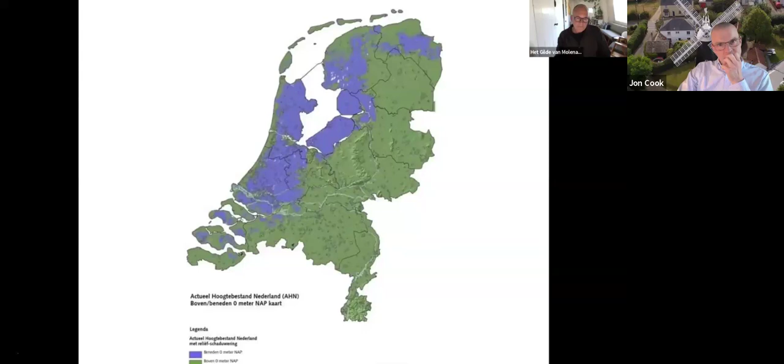There was also a rise in sea level. Water nuisance increased and measures had to be taken. The monks of Egmond Abbey were probably the first to build internal dikes to protect their lands from flooding. This started at the end of the 10th century. As the external water level rose and the reclaimed peatland subsided, it became harder to discharge excess water naturally. People first turned to hand, tread, and horse-powered watermills, and later to small windmills.

In 1407-1408, William VI, Count of Holland, ordered some of his advisors to investigate a mill in Alkmaar, that's where I live now, that was pumping out water. They traveled from The Hague to Alkmaar to investigate how Floris van Alkemade and Jan Grietensoen were using a mill to discharge water. This was considered very important in The Hague, though the exact method of pumping was not recorded. Unfortunately, there are also no images of the 15th century mills.

Later, quays were built and simple sluices and closable culverts allowed water to be discharged into the water outside the polder, only when the external water level permitted. The establishment of polders created artificial control over water levels. A difference arose between the external and internal water levels, or between the boezem, the buffer, and polderwater. Small polders were merged into larger ones, each with its own administration. The focus shifted from individual measures against water nuisance to collective solutions.

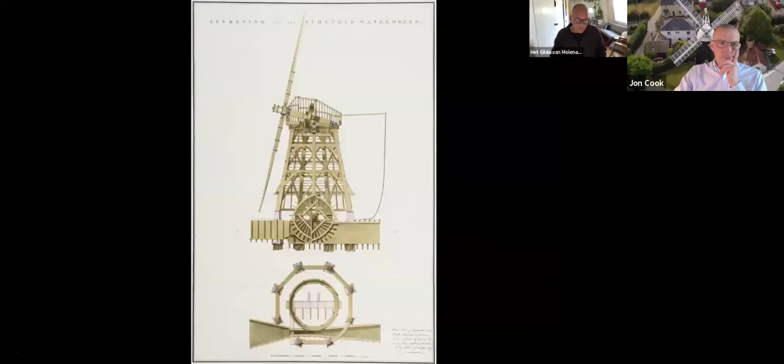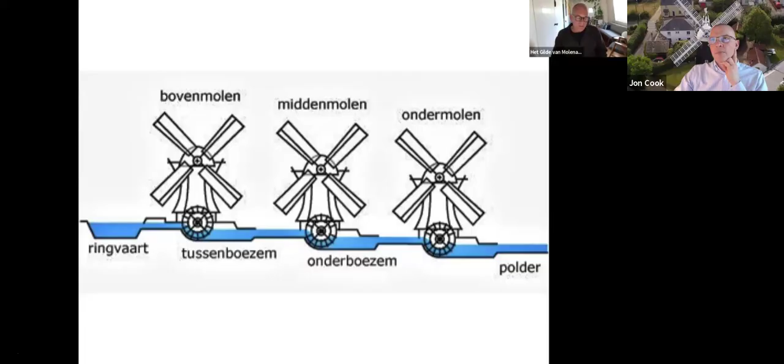Meanwhile, the mills had grown into impressive giants equipped with large scoop wheels. A scoop wheel could lift water about 1 meter. Since the lakes were about 4 meters deep, a series of 3 or 4 mills was needed to pump a lake dry. From 1630 onward, the Archimedean screw was gradually introduced. Its advantage was that it could lift water higher.

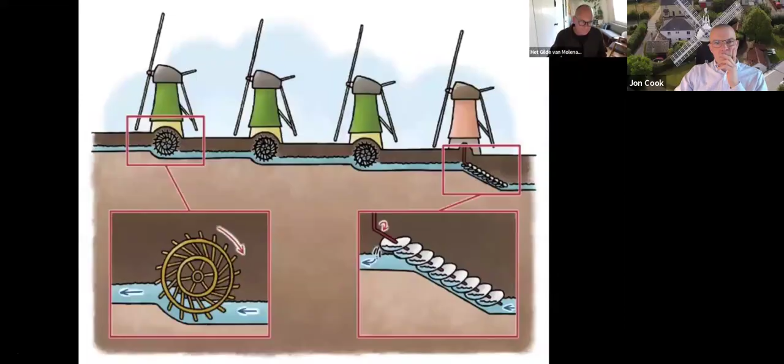An important figure of that time was Jan Adriaanszoon Leeghwater. He was not the executor of these large projects, but was often asked for advice. As an independent, he actually was the first hydraulic consultant in the Netherlands. Each drained lake became a polder with its own administration for water management. Through mergers, these administrations formed water boards, which still exist today.

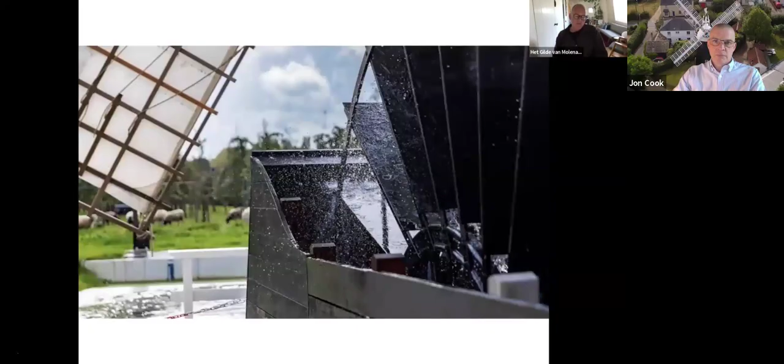In North Holland, that's where I live, there is a large water board responsible for water and dike management. This board also owns 19 working windmills that can be deployed in emergencies like excess rainfall due to climate change, power failures, etc., to pump away water completely climate neutral. In total, there are 59 mills in the province of North Holland that are operational and can drain the land. All these mills have millers who are more than happy to step in when needed, just as they did 400 years ago. And now we're going to watch a little film.

A significant portion of the Netherlands lies below sea level, and without its dunes and dikes, it would certainly flood during high tides or elevated river levels. The area of the Netherlands that lies lower than 1 meter above normal Amsterdam level is what we call Low Netherlands, and that is a very large region.

The Low Countries were once a peat bog. The peat soil was waterlogged like a wet sponge. If you want to build a house or sow crops on that peat soil, you'd first need to dry it out. People did this by draining the water through ditches. But as soon as you dry out peat soil, it subsides and the land sinks lower and lower.

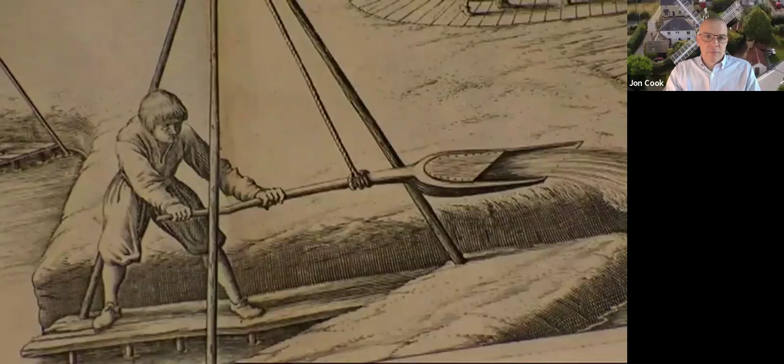Therefore, the people had to come up with a different solution. They realized that the water from the polder needed to be scooped upwards. Fortunately, people came up with the idea to use the windmill as a water pump, and that's how the first polder mill was constructed.

The first polder windmills operated using a scoop wheel. This wheel is essentially a type of wheel that rotates by the power of the mill's sails. It extends a small portion into the water, which is channeled from the ditch directly to the mill. The scoop wheel is equipped with wooden planks that continuously scoop the water out.

A small scoop wheel cannot lift the water as high as a large scoop wheel, but in the meantime the land kept sinking further and further. The polder mills therefore became larger and larger because they had to drain ever deeper water. However, the scoop wheel could not reach any deeper than 1.5 meters. To be able to go deeper, around 1630, the scoop wheel was replaced by the Archimedes screw.

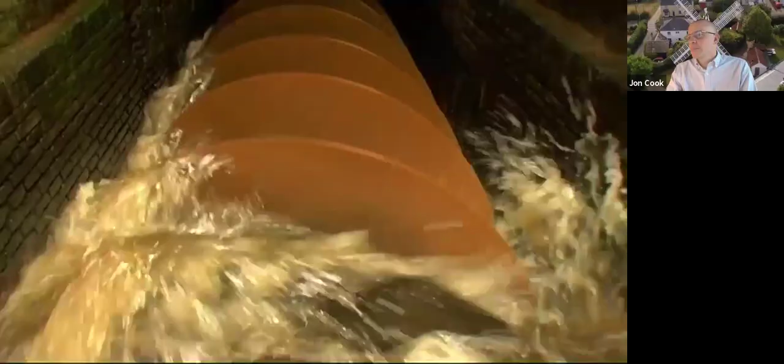Often, polders were simply too deep to be drained by a single mill alone, so they created a staircase of several mills, each passing the water to the next. The bottom mill drains the water from the polder ditches into the first intermediate basin. The middle mill pumps the water up to the next intermediate basin. The last mill in the row, the upper mill, pumps the water out of the final basin permanently out of the polder.

The pumping of water away in stages using a series of windmills is known as stepped drainage. You can still see these mill systems today, sometimes even in operation. Due to the step dewatering process, all the lakes could be pumped completely dry. And that's exactly what happened extensively from the 17th century. These polders, such as the Beemster and the Schermer, provided a great deal of new land, but they also offered significant protection against the turbulent waters of the wild lakes.

During storms, the waves would violently tear away the land from the riverbanks. It was as if the water itself was actively devouring the land. This destructive process they named the water wolf. The polder windmills were thus the primary weapon in the battle against the dangerous water wolf, and there seemed to be no end to their collective power.

Or was there? The Haarlemmermeer was so incredibly vast that it was believed it would take many centuries before it could ever be successfully drained. It was only with the groundbreaking invention of steam pumping stations, which possessed significantly more power and efficiency than traditional windmills, that even this largest and most notoriously dangerous lake could finally be reclaimed. Ultimately, 3 powerful steam pumping stations were employed to pump out the water from the Haarlemmermeer, a monumental task that spanned 4 years.

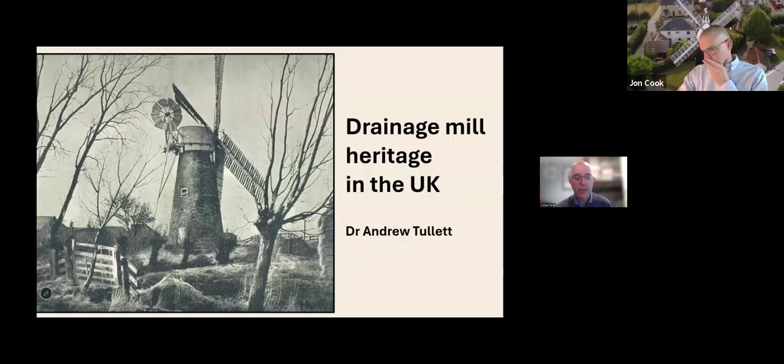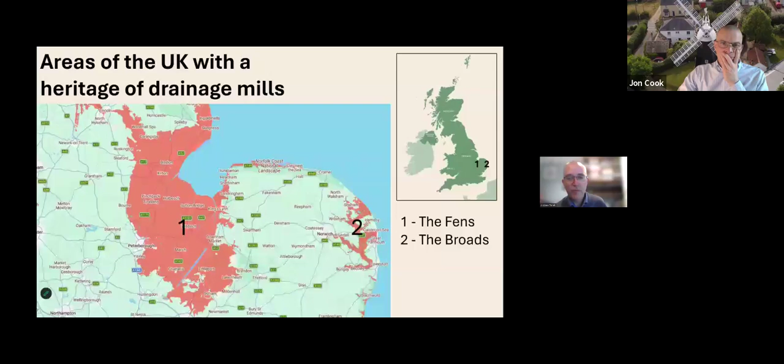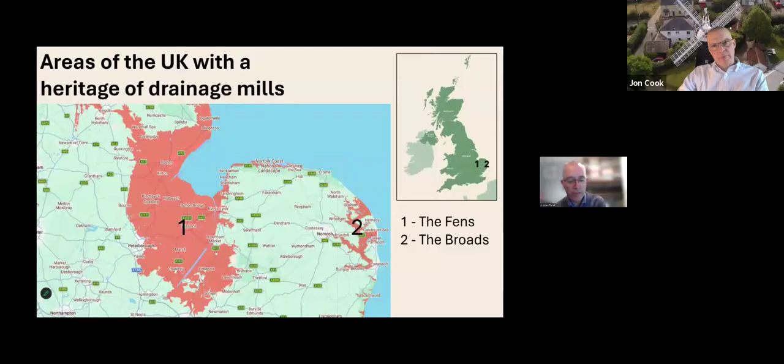The situation in the Broads is very different. There have been no major engineering schemes on the same scale as in the Fens. Water levels were still managed, but this was to prevent grazing pasture from being flooded over winter, which would kill the grass and then the cows would have nothing to eat. Water levels are still managed today, but the mills have been replaced by electric pumps.

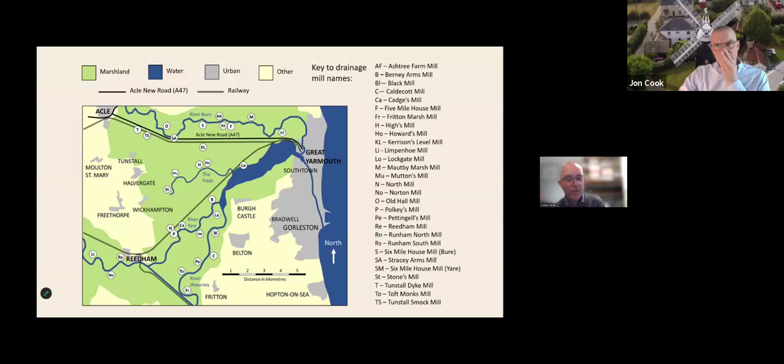Many of these types of mills were congregated in one area, the Halvergate Marshes, which includes Ashtree Farm Drainage Mill, and there are around 30 listed here. However, the remains of 70 drainage mills altogether are known to exist throughout the Broads still, and they represent several different designs, and all are in various states of decay. They range from barely recognisable ruins to fully functioning mills still capable of lifting water, although the latter is very rare.

Polkey's is on an important site. It not only has Polkey's Mill, the windmill, it also has a steam engine house, which ran a turbine, and a diesel engine shed, which ran pumps. Modern electric pumps are also based here. So the whole history of drainage technology is all congregated on this one site.

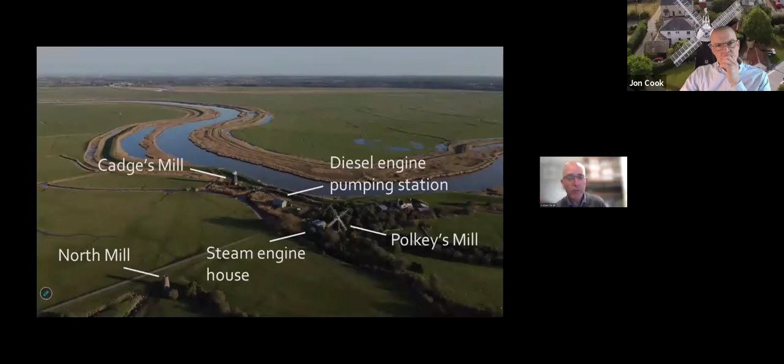Unfortunately, very few people get to see it. There's no public road to the site. You can only get to it after a long walk along the flood bank or by boat. Even when you get there, there's no facilities. So these intrepid visitors are on a guided walk. They brought their own lunches, and they've all been warned that there'll be no toilets until they get back home again. And this is where it gets complicated.

Drainage mills arrived in the Broads much later than they did in the fens, perhaps 100 years later. By the later 1700s, when Brograve was built, they were relatively common, though. And there are 8 mills standing that might date from around the 1700s, including Brograve Mill, but most were adapted or changed over time.

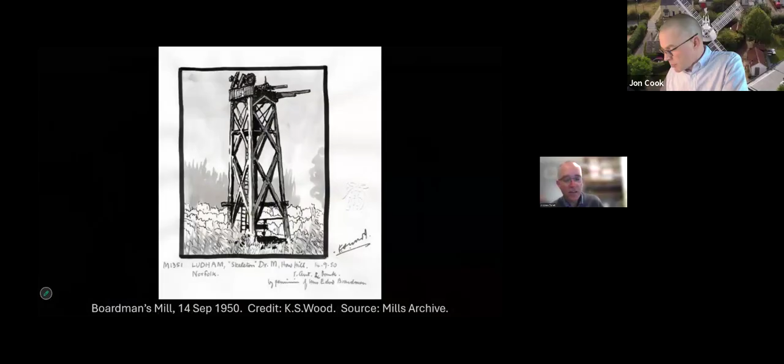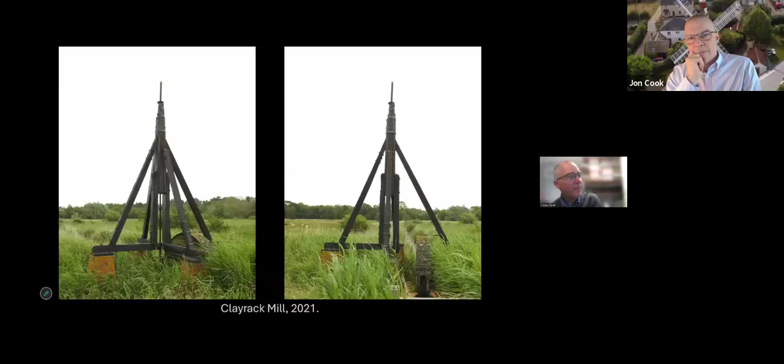An even rarer survivor is the hollow post mill. And that's what you're looking at here. This is Clayrack Mill. There's not many of us that can say we're in better condition now than we were 45 years ago, but Clayrack Mill can, even in this state. This is how it was found in 1981 when it was discovered at Ranworth. It was disused, disintegrating, and the landowners didn't want it. In fact, they didn't know it was there.

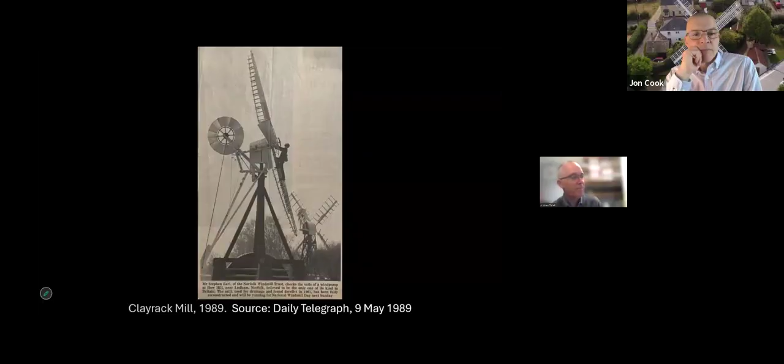Each year, Historic England publishes the Heritage at Risk Register, and currently 3 Broads mills are included on the list. And they include Boardman's, which we've met, Herringfleet Marsh Mill, which I've mentioned, and also Turf Fen Wind Pump, which is also at How Hill, same place as Boardman's Mill. Sometimes when these risk registers are published, it causes alarm. One of the good things it does is it makes funding available that previously isn't, so it's not always a bad thing.

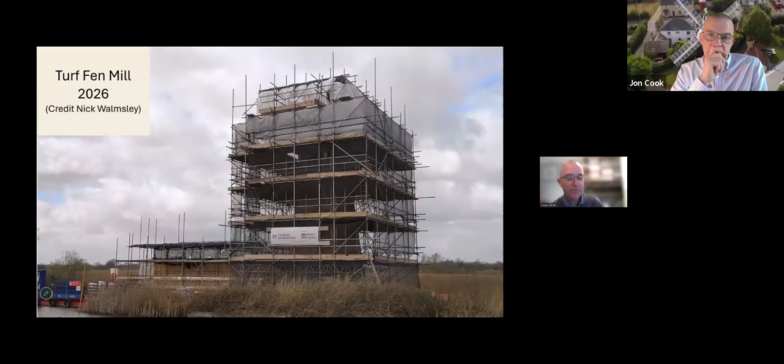And that's the case for Turf Fen Mill, because this is Turf Fen Mill this year undergoing a major restoration. It is an important mill. It ran 2 scoop wheels. It had double gearing. But again, it's only the tower, the cap, and the sails that are going to be restored on this mill to be preserved as a landscape feature. And hopefully, it will regain its place on the cover of the Ordnance Survey map of the Broads. Currently, it's been displaced by Thurne Mill, but I'm not going to show that picture. Makes me upset.

I would say that the main threats to the remaining examples of the UK's drainage mill heritage are threefold: lack of knowledge, lack of skills, lack of money. I would add a fourth, apathy, but I think that's a product of the first 3. In the UK, most people associate mills with flour production, and most people who visit the Broads come to enjoy boating. And often they don't appreciate that the mills they are seeing were built for an entirely different reason. The mills themselves are often only found beside waterways or in the middle of remote marshes, where even people who live in Norfolk won't see them that often.

And many are very inaccessible. It's very difficult to find opportunities or volunteers to run and maintain them. And there are very few people with the millwrighting skills required to restore them sympathetically as well. And restoring these mills has added complications, especially when they're in environmentally sensitive areas like grazing marshes. It makes the task very difficult and extremely expensive.

And aside from a few individuals with very deep pockets who own their own mills, the future of Broads drainage mills, the last in the UK, really is vested with these institutions. And they have all sorts of other priorities as well. And it's really up to us mill enthusiasts to make it clear to them whenever we can that people care about these machines and believe that time, effort, and money should be spent on protecting them. Thank you very much.

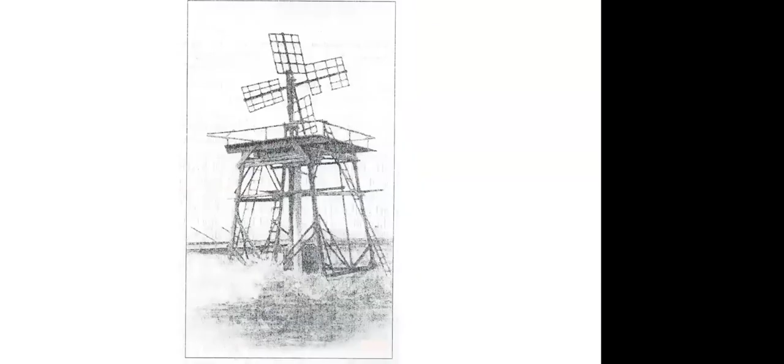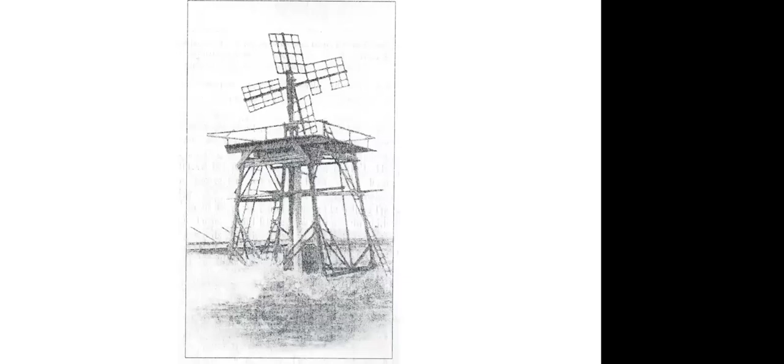It is likely that Halladay had observed wooden-bladed, shop-made wind pumps that elevated seawater into shallow oceanside evaporation ponds for salt making along the nearby coast. Their simplicity may have inspired him to consider making similar rudimentary wind machines that could take care of themselves.

Whatever his inspiration, Daniel Halladay in 1854 developed the concept of a paddle-bladed wind machine that on its own governed its speed and operation. One of the major concerns was to prevent the blades from spinning so rapidly that they tore to pieces from centrifugal force. Halladay addressed this concern by placing centrifugal weights on his paddles.

These weights drew the pivoting blades back to more oblique angles, reducing the surface area exposed to the wind and thereby regulating the speed of rotation. A rigidly attached vane automatically directed the machine into the wind whenever its direction changed. By combining these two principles, Daniel Halladay successfully developed a self-governing wind engine. It was the first ever to achieve commercial success.

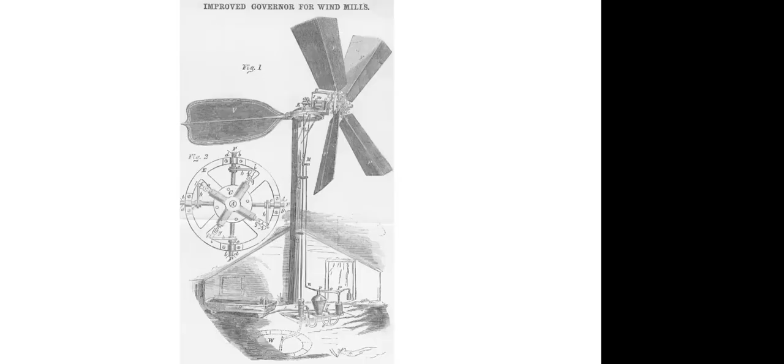The inventor founded a company in Connecticut to produce his wind machines, which farmers and others purchased to elevate water and to grind feed for livestock. But sales were not what he had hoped. Then in 1863, with the assistance of investors, he moved the factory just under 1,000 miles, 1,600 kilometers, to Batavia, Illinois. This was near Chicago and had convenient railway access.

But more importantly, it lay at the eastern edge of the vast treeless Great Plains that stretched westward 1,000 miles, 1,600 kilometers, to the Rocky Mountains. This broad, open grassland was even longer north to south, stretching 1,800 miles, 2,900 kilometers, from Texas to the Canadian prairies. The whole area was just then filling with Euro-American settlers. Consequently, this western area in North America became a gigantic market for groundwater pumping wind machines.

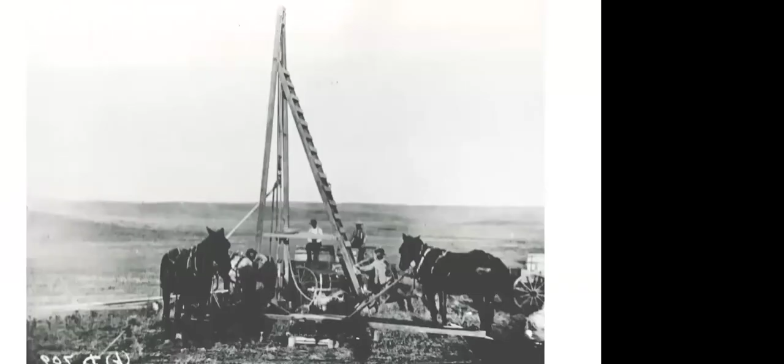The western two-thirds of North America generally lacked sufficient water in rivers and streams to support intensive human occupation. People who settled near enough to these sources to haul it back to their homes, farms, and ranches in wagons could live on the land, but they could only concentrate close to stream courses. The self-governing wind pump, developed first by Daniel Halladay, helped resolve this limitation. If farmers or ranchers could afford the cost for a driller to sink a well and to purchase a windmill, they could live virtually anywhere that they chose.

The price, however, was not cheap. An ordinary 12-foot diameter wind engine on the Texas plains in the 1880s cost $130. Today, $5,200, plus shipment and expense of erecting a tower. At the same time, drilled wells in the same region cost $1 a foot. Today, the equivalent would be $40 a foot for the first 100 feet, $1.50 a foot for the next 100 feet, and then 50 cents a foot in addition until water was struck.

Despite the expense, wells and wind pumps together did enable Euro-Americans to occupy the land surface more or less evenly rather than just along stream courses. The economic and social impacts cannot be exaggerated. Makers of farm implements in Canada drew their inspiration in wind engine design from both the United States and England. The country soon had its own indigenous industry, making the machines and their accoutrements. Canadian manufacturers recognized that the prairies represented a substantial market for their goods, and they prospered manufacturing windmills and pumps for decades.

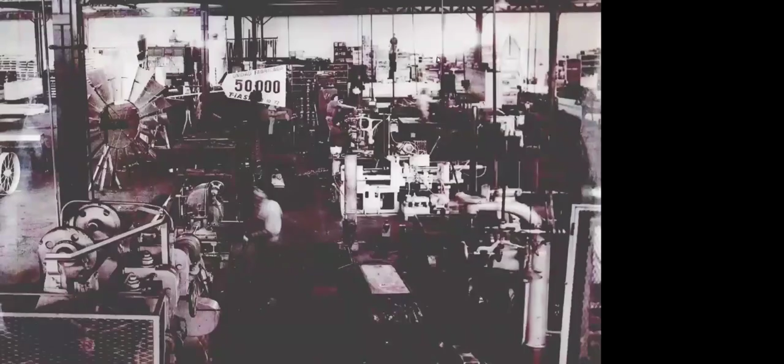The conditions that made American-style wind engines integral to economic developments in North America were mirrored in other places around the world where they remain important. The pampas of Argentina and Uruguay, broad treeless prairies rich in pasturage, became cattle-raising country, famous for its gaucho horsemen. Ranchers there soon began importing wind pumps from both the United States and Europe. As might be expected, this led to the development of South American-based factories, which thrived. Currently, the largest manufacturer and exporter of water-pumping wind machines in the entire world is Fábrica de Implementos Agrícolas Sociedad Anónima outside Buenos Aires.

Rural Australia became the third place on the globe to employ truly huge numbers of wind pumps. Like Western North America and the Pampas, it has huge land areas bereft of surface water, but abounding with groundwater. As in South America, farmers there first imported self-governing wind engines from Europe and the United States. But the country developed its own large wind pump manufacturing industry that produced the machines by the tens of thousands. Without these devices and the drilled wells to access underground aquifers, economic development in Australia would have taken wholly different courses.

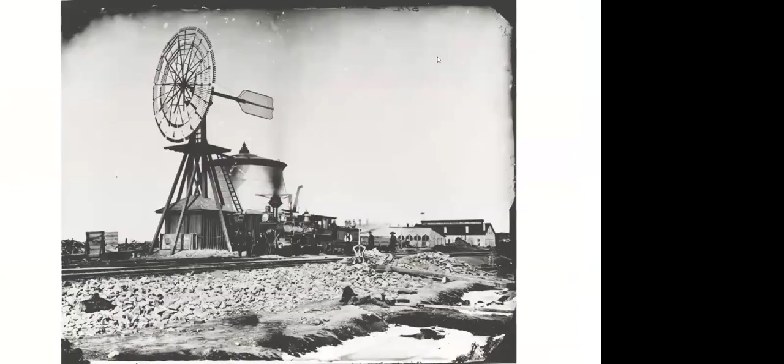Drilled wells and wind engines to pump water impacted more people than just rural dwellers. One of their significant contributions was to the operation of steam railways that bound together entire nations around the world. Locomotives required water in their boilers to create the necessary steam, but that water needed to be both physically clean and free from minerals like calcium carbonate that could clog their boiler tubes.

During the early years of railroading, locomotives stopped frequently for water, but by the middle of the 19th century, after they began pulling tenders carrying both water and fuel, the intervals grew to every 100 miles, every 160 kilometers, depending upon track grades and the weights of cargoes.

In areas with limited surface water, or where pipelines were not feasible, windmills pumped groundwater into overhead reservoirs from which locomotives received their supply. The wind machines typically ran until they filled the large tanks, when automatic cutoff mechanisms shut them off. In the United States, most of these reservoirs held 50,000 gallons, about 190,000 liters.

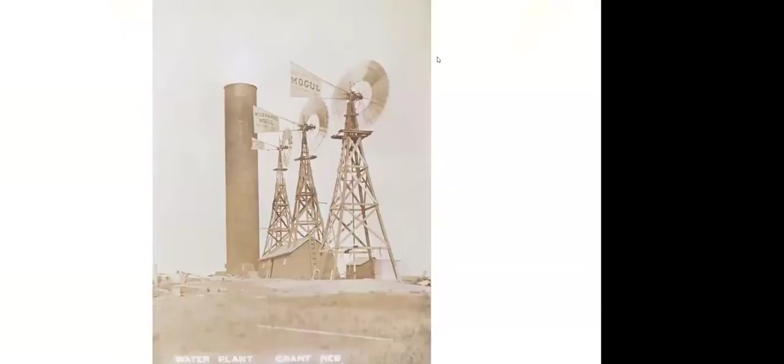Although urban areas seem unlikely places for wind pumps, many communities relied on them to pump their entire water supplies. In some locales, large diameter windmills elevated water for municipal water systems. In some cities, cylindrical reservoirs were placed atop multi-story commercial and tenement buildings to provide water under gravity pressure for fire protection, with windmills elevating that supply from wells underground.

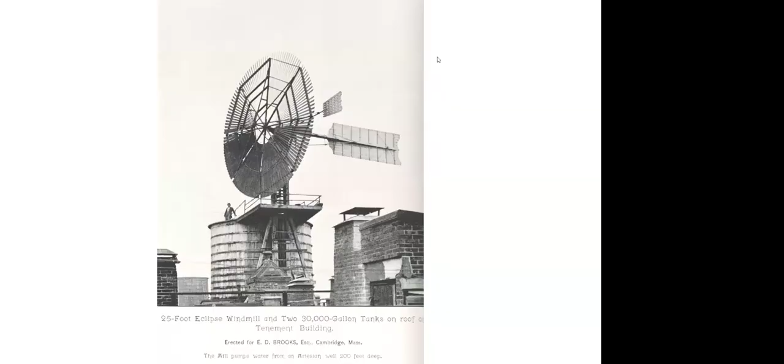Elsewhere in urban areas, individual residence owners, depending upon their personal wells for supply, used the wind to elevate water into private storage tanks. In some affluent areas, owners of estates or mansions mounted windmills on decorative towers that sometimes also supported raised reservoirs.

European-style windmills had introduced the concept of using the wind to serve human needs. Although newer technologies assumed their earlier roles, in the 20th century, romantic notions of the past sometimes brought the old world windmills back to work. In a representative case, the city of San Francisco, California, in 1902, erected a 75-foot, 23-meter Dutch windmill to pump irrigation water in Golden Gate Park.

The experiment was so popular with residents that they themselves raised funds to erect a second windmill 5 feet, 1.5 meters taller than the first. For years they did yeoman service, their water converting a sand dune-covered wasteland into a now verdant public space. In time, electric pumps supplanted the windmills, which deteriorated only to be reborn through intermittent preservation efforts that began as early as 1974.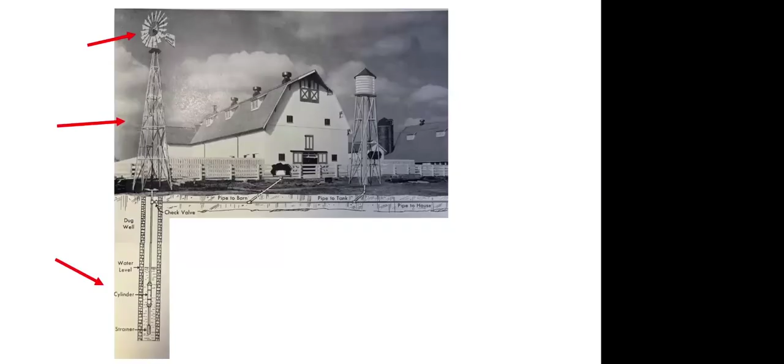An Aermotor, like most traditional all-metal water pumping windmills, consists of three main parts: the windmill, including wind wheel, hub and shaft, mainframe, gearing, and vane assembly; a tower; and the water pumping assembly, which includes the drop pipes, sucker rods, and cylinder. Wheels on Aermotor windmills, no matter the age or size, consist of 18 contoured trapezoidal sheet metal blades held in place by special metal clips attached to two concentric steel rings and secured together by steel spokes that are attached to the hub.

The wind wheel starts turning when a sufficient wind of 8 to 10 miles per hour or 13 to 16 kilometers per hour strikes the curved blade slightly off center. Keeping the slightly off center wheel facing the wind is a V-shaped sheet metal tail vane attached to the back of the mainframe of the mill by a hinged steel tailbone and vane spring.

The mainframe, which supports the wheel sections and tail, swivels on a mast pipe. When the wind becomes too great, for example, reaching above 20 miles per hour or 32 kilometers per hour, the force of the wind starts to furl the mill, turning it on the mast pipe so both the tail and wheel are parallel to the direction of the wind.

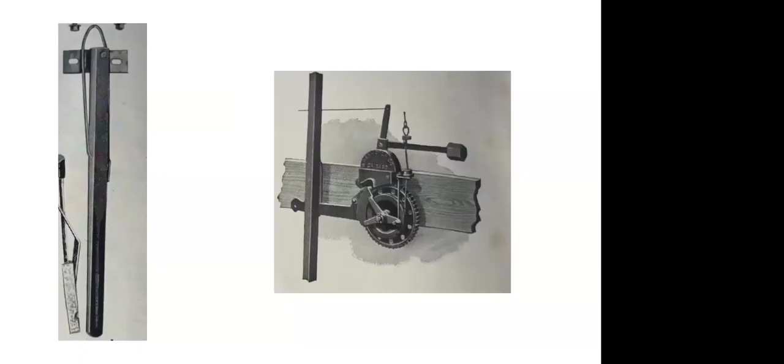The tension of the vane spring increases as the mill is furled and returns the mill to face the wind as the velocity decreases. The windmill can also be taken out of service by using a manual furling device or mechanical regulator. To access the wind, windmills are erected on tops of wood or metal towers.

All metal Aermotor towers are known for their distinctive attributes, namely their loop steps, which are connected to a single corner post or leg of the four-post tower. The towers are secured to anchor posts set into holes in the ground of an average 4 feet deep or just over a meter deep.

Aermotor towers range in height between 21 feet or 47 feet, or 6.5 meters or 14 meters, although taller towers are used. For the best access to the wind, the tower needs to be at least 15 feet or 4.5 meters taller than any nearby wind obstruction, such as buildings and trees within a radius of approximately 400 feet or 120 meters. Near the top of the tower and just below the wind wheel is either a wooden or metal platform on which a person can stand to perform maintenance and oil changes.

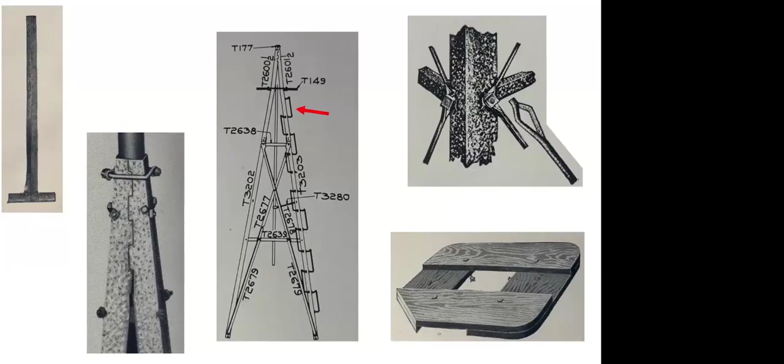The wind wheel, when in motion, drives the hub and shaft, which are connected and housed within the cast iron mainframe. Inside the gearbox is the shaft, with two small pinion gears attached and evenly spaced by a Babbitt bearing. These small gears mesh with two larger gears, which drive two pitman arms that are held together at their opposite ends by a short shaft with a roller guide supporting yoke.

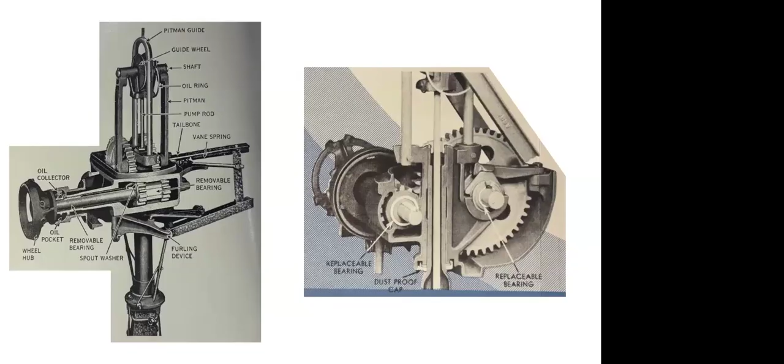As the gears drive the pitman arms, they transfer their rotational motion to reciprocating action needed to operate the pump rod. The up and down motion of the pitman arms is kept in place by a looped steel pitman guide, to which is also bolted the protective sheet metal helmet of the windmill. A metal ring supported by the pump rod yoke picks up oil from one of the larger gears on the downstroke of the pump rod and carries it to the cross shaft, keeping all the upper parts lubricated.

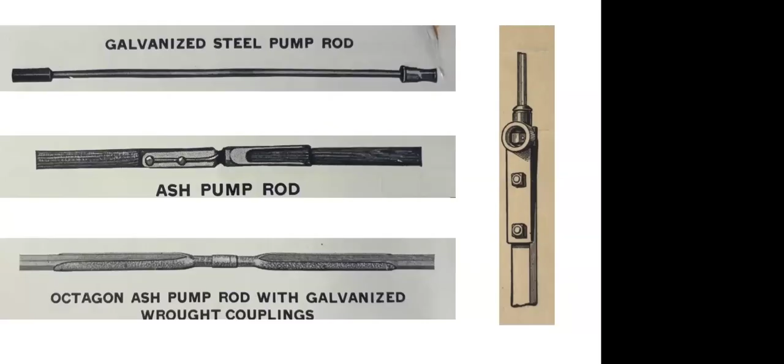Attached to the yoke, the pump rod is suspended through the center of the mast pipe. Inside the tower, it attaches to a swivel, where it connects to a series of narrow rods. Wood is recommended, which in turn are bolted end to end and attached to a series of metal sucker rods starting at ground level. The bolted together string of sucker rods is lowered inside a steel drop pipe which lines the well. The bottom sucker rod screws onto the plunger on a brass pump cylinder.

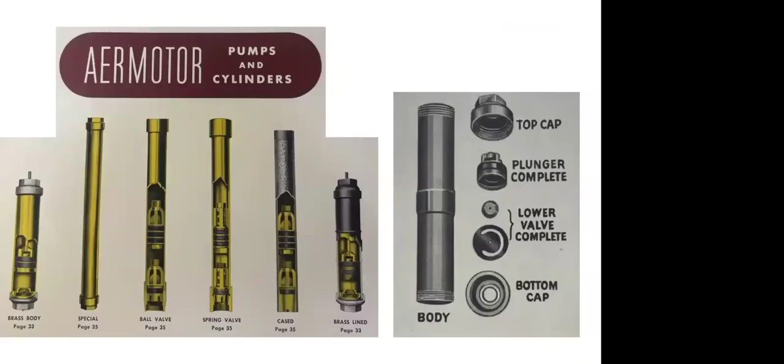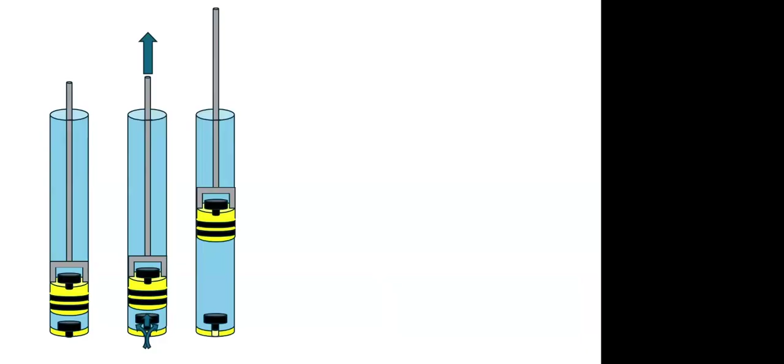These pump cylinders consist of an internal steel rod, one check valve, and one plunger valve. The check valve screws onto the bottom of the cylinder, and above is a plunger valve that is attached to the sucker rod. Water flows into the cylinder through the check valve during the upstroke of the plunger valve, and then on the downstroke, the check valve closes, pushing the water through the plunger valve and into the drop pipe. The plunger valve then closes on the upstroke, pushing the water higher while refilling the cylinder through the check valve.

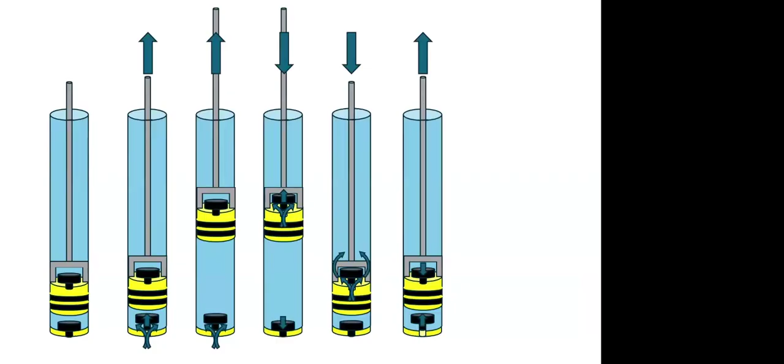As a general rule, when calculating the length of a cylinder to use, the length of the pump stroke should be equal to or greater than in inches to the diameter of the Aermotor windwheel in feet. For example, an 8-foot or 2.5 meter mill's stroke equates to approximately 8 inches or 20 centimeters. With the Aermotor vane spring at maximum tension, the typical 8-foot or 2.5 meter windmill, when running at full speed, makes about 32 strokes of the pump per minute.

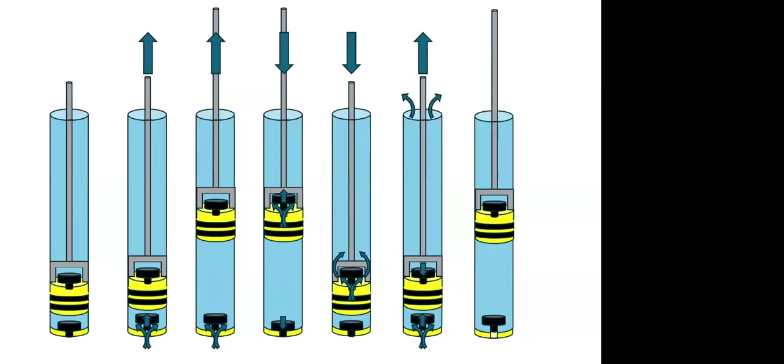With each stroke, water fills the drop pipe until it reaches the surface and discharges into a tank or pond via a raised splash pipe. If the water is destined for an overhead tank, then a stuffing box is used to force the water higher until it discharges into the holding tank for irrigation or watering livestock.

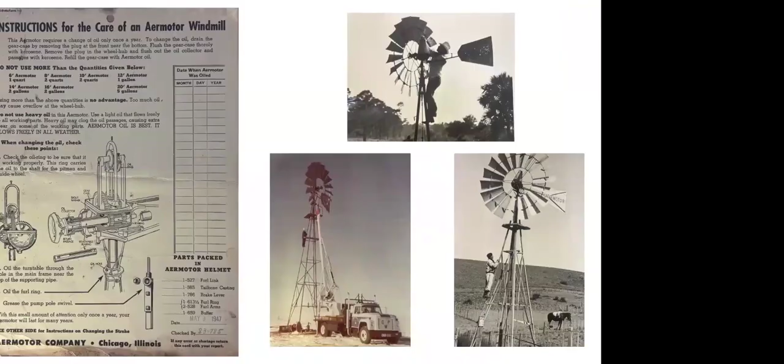The key to an American water pumping windmill's longevity of service, and there are cases in which some windmills have pumped water continuously for 60 to 70 years, is routine maintenance. Once a year, the oil in the gearbox should be changed, and any loosened nuts and bolts of the windmill and tower should be tightened. Occasionally, the pump cylinder must be pulled to the surface for inspection and to replace the worn leather washers of the plunger valve.